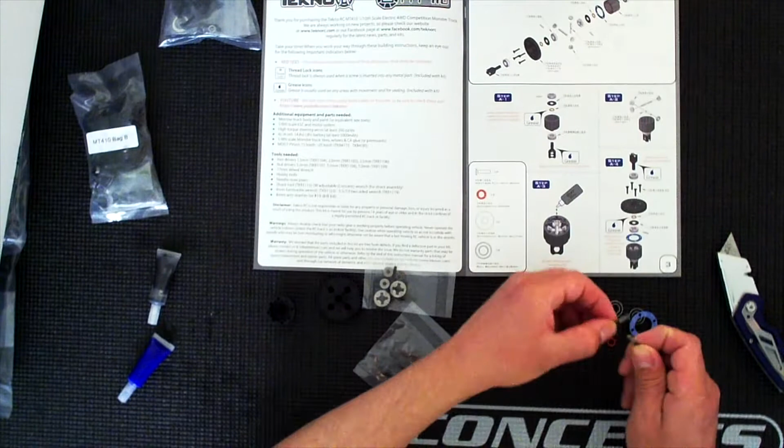One of the things that I like about the MT, this one here for Tekno, is the center differentials. The cross, these are metal, which is great. This is what holds your conical gears for the differential.

On my SCT 410.2, it did not come with metal ones, it came with plastic ones. Now, I never broke any of the plastic ones, so as far as I'm concerned, they're good enough for that vehicle. But keep in mind that if you're running 2S, 3S, it probably doesn't matter. On one of my trucks, I'm running 4S, so I decided to just replace them. I figured I'd do preventative upgrades or preventative maintenance instead of risking one of those crosses breaking.

But here we go. Let's see, spur looks very similar. But we will get started.

Something very important is the O-rings. You always want to lubricate the O-rings as well as these grooves. So there's these grooves in here. Actually, you can probably see them better there. Yep, there you go. You want to lubricate them. That is something that's very important that you need to do.

So that being said, we will just get the black grease that is provided. If you have black grease just lying about, you can just go ahead and use that. Any grease works. But here I'm going to use the one that's provided, so I'm using everything in the kit for the build. Alright, and that is fine.

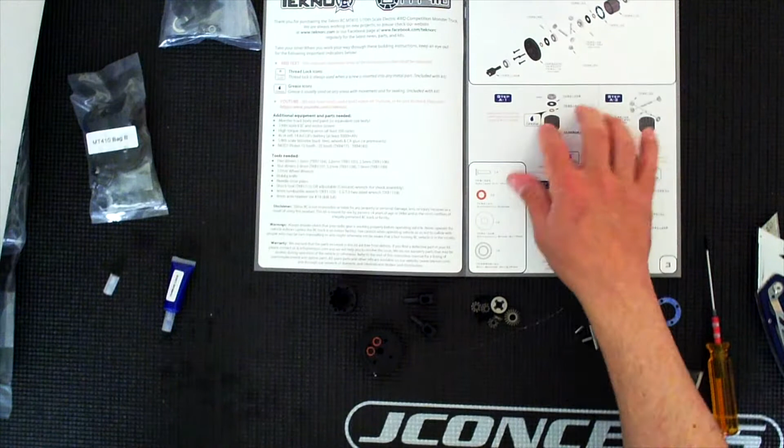So now we can start with the build. Now you can go step by step here. I've built a few of these, so I'm just going to look at the pictures. But you can also just look at this general image and go off that when you're building it.

Shop towels I generally use just for my fingers, but these are pretty good if you buy those. Use terry cloths, except for, I really don't like the lint they leave, so shop towels are pretty good.

But here we go. So that being said, if you look at these, both of these happen to be the same, so it doesn't matter which is which. So at this point, I'm just going to grab a bearing. The bearing will actually go in this housing, so it's just going to snap on. And this piece here will just go in there.

You're going to deal with it later in here. And by later, I mean right now if I can get one of these O-rings out of there. And I'm going to drop one of these O-rings. This diameter is so large that I can actually manage to slide my thumb through.

Now I'm actually going to grab my 7mm driver to just push the O-ring in. So make sure you use a 7mm driver. That just pushes the O-ring. So that's where the O-ring goes, at the bottom. And then after that, you have this washer.

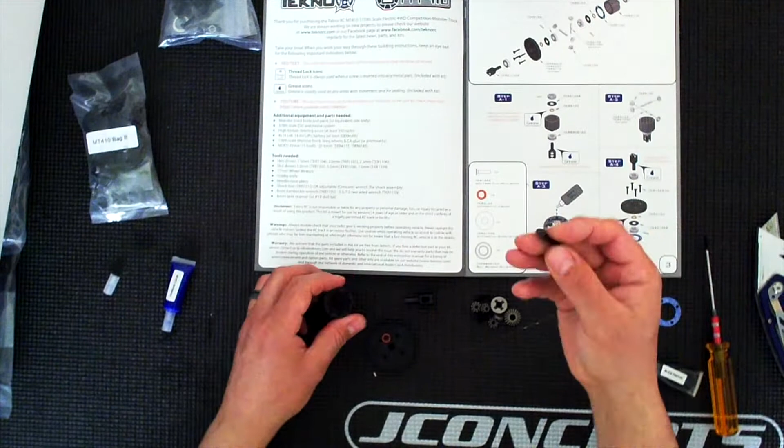Now, I do like to apply a little bit of black grease here, and that's just because this will be contacting the O-ring. You do not have to do this, this is just something I prefer to do. In my mind, it helps preserve the O-ring.

Now, you can try to drop it in if you have pliers. I'm just going to hold it this way and feel for it. Here we go. And then flip it. And it's there. Take my driver. That is seated. Once it is seated in there, you can continue with the next steps.

So the next step is to grab one of these pins. And this pin, you will notice, let me use this one, there is a hole in there. So you're going to have to drop the pin and then slide it in. You can do that a variety of ways. You can try to just line this up.

So if you find the hole, which is here, this is the easiest way. The hole's going to match this groove. So if you know this groove is there, that's where the hole is. You can just line this up with that and then kind of drop it in, and you can fail miserably. Use a driver or just use some pliers, which is really the easiest way to go. It doesn't matter which ones, I'm just going to use these.

These Kobalt tools, I'm not particular to the brand, but they were inexpensive and they're very good for the price. If you already have some others, go for it.

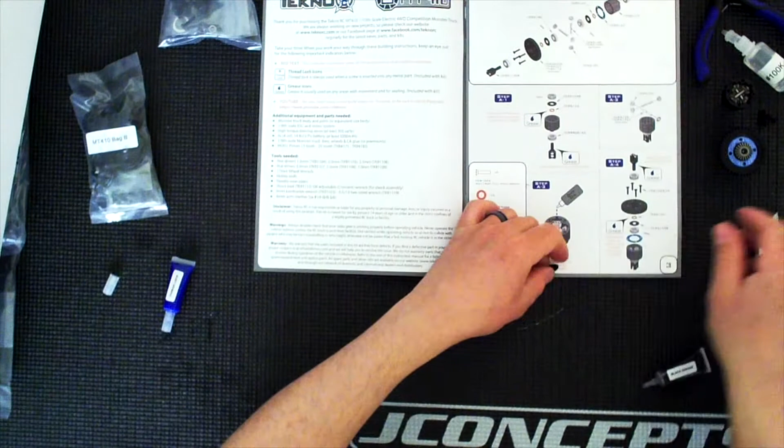Thanks for catching me. Some of you are probably wondering, wait, what about the other washer? How many of you noticed? Let me know in the comments.

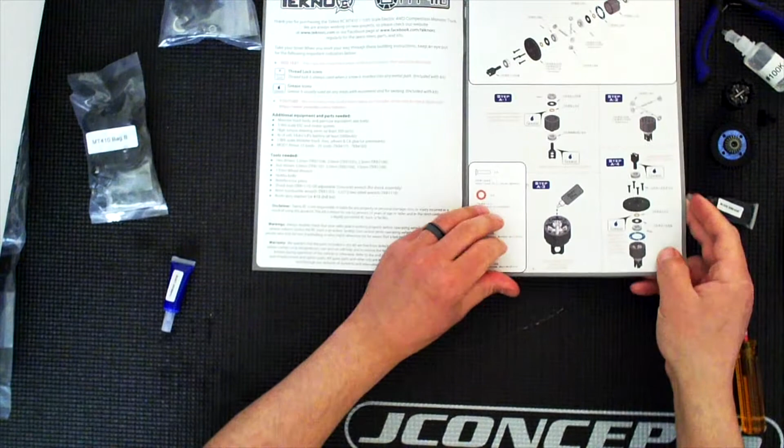All right, so bag B, and everything's labeled in order, right? A's before B, etc. So here we're going to have the front and rear differentials. Therefore, you build one, you're going to build the other. Now, usually you want to mark the front from the rear. In this case, because we're using the same oil, you do not have to, so it will not matter.

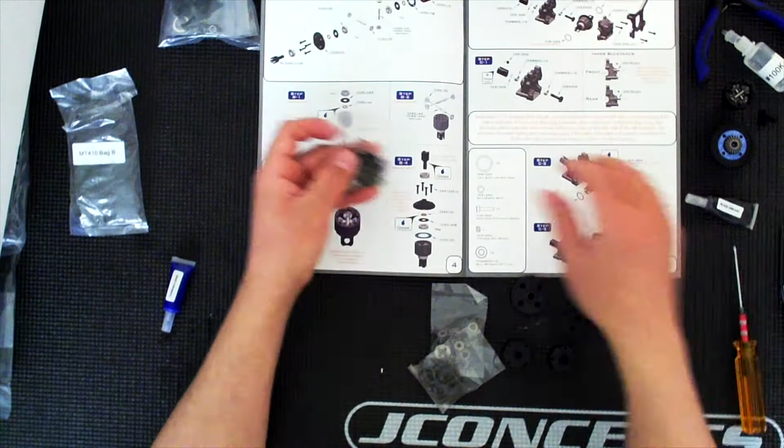Another side note, when you're cutting this bag, be careful not to, one, cut your fingers, but two, don't cut the O-rings that are there accidentally. So that is something that you have to watch for.

All right, we have this. We have these here. These appear to be more robust than the short course version. They are quite heavy for their size. Here we go.

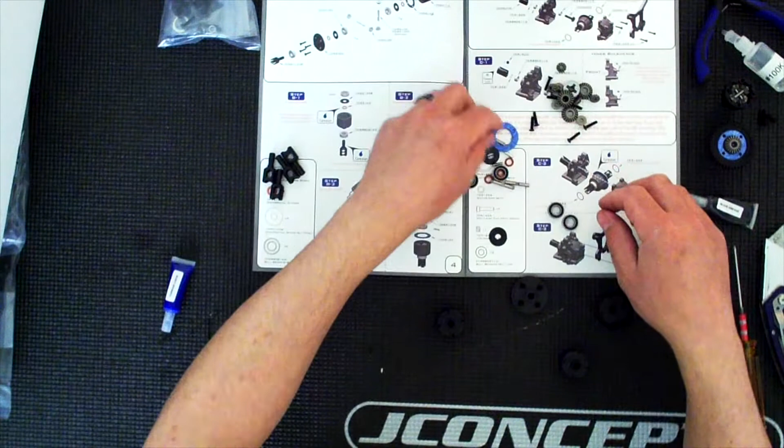And the differentials, we have all the parts here. Usually just spread everything out. There's an O-ring stuck in there. Here we go.

Now this is a basher, so we're building a basher, but just to note, some people, whenever they're doing a race build, they're building an RC for racing, they'll take the bearings and actually remove those rubber seals carefully on both sides, and then they will remove the grease using alcohol, for example. Once they do that, they'll just use machining oil to oil the bearings instead of grease. That's just so they run a little smoother.

And I pre-opened that. Here we go. All right, so here we go. We're going to get started. So we're going to grab one of these and we're going to go through the same process.

The easiest thing is to go ahead and just apply the bearings. If you just place the bearings into every single one of these, here's the gear, here's the other housing, and here's the other one, especially when you're building something like this, just to save time. You have all the bearings, right? We did this step and we did this step right over here.

Now I'm going to go ahead and just grease all of these. If I just apply grease to one, just run this like this with my finger, and I'll have some excess grease, run this grease over here. And here we go. We have enough grease for the other one. There we go.

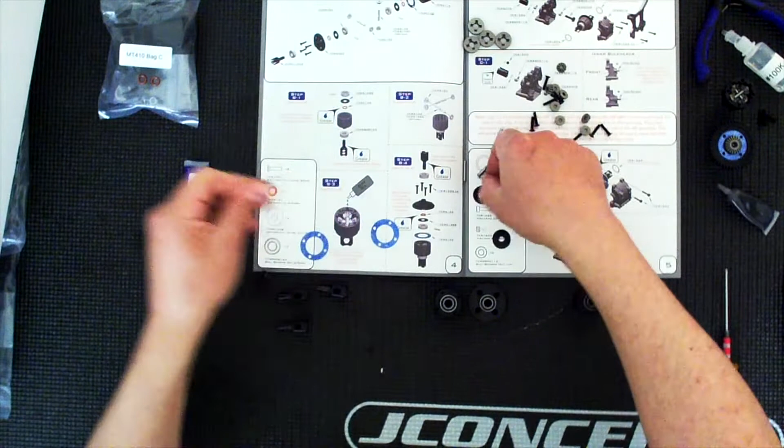And just going to apply some grease to my finger, and the reason why is so I can just play with the O-rings. Here we go. All right, there's one, two, I'll put this on the bag. And there's 3, 4, and then I'll deal with the washers later.

All right, and here we go. So again, grab one of these, go through there, grab an O-ring. See, I should have done it the other way. Just set it on your finger and just hold it. Just feel for it. Once it's there, grab your 7mm driver, push it in, and we're just going to do it to every single one.

If you happen to be watching this video while you're building it, I think this is the best way to build everything quickly - to set similar parts in together instead of doing one and then the other. Just take care of everything that is similar.

Here I'm going to go ahead and place this. There we go. And I can go ahead and grab the washers.

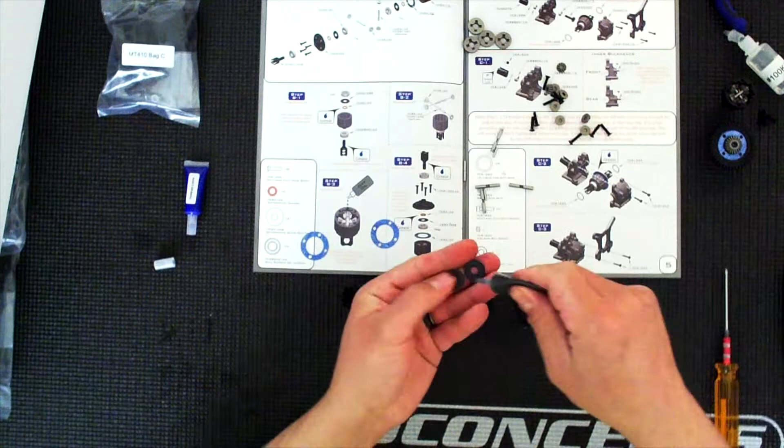There are 4 of these. I'm only going to be applying grease to the surface that will come in contact with the O-ring, and it's not really much that you need. Do not go overboard - it's just a little bit of lubrication so it doesn't tear the rubber. Maybe a little more. That is fine.

There we go. And your pins, they ride on these. That's why you need these, so that it doesn't ride on the O-ring. It just saves it - that's the reason why.

At this point, I'll go ahead and grab this. Again, remember, just align it to that. So this will go in here. Once you have it in there, you can just drop it in. Oh, no.

This one is not cooperating. There we go, all right, so I do that. I can grab one of these, drop that gear in, and that is all.

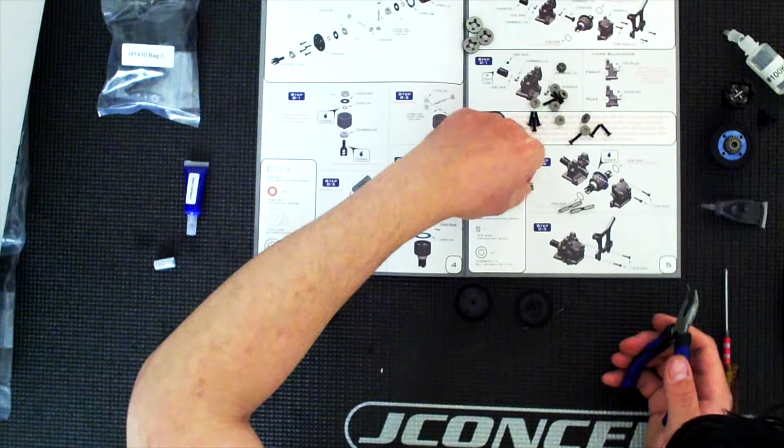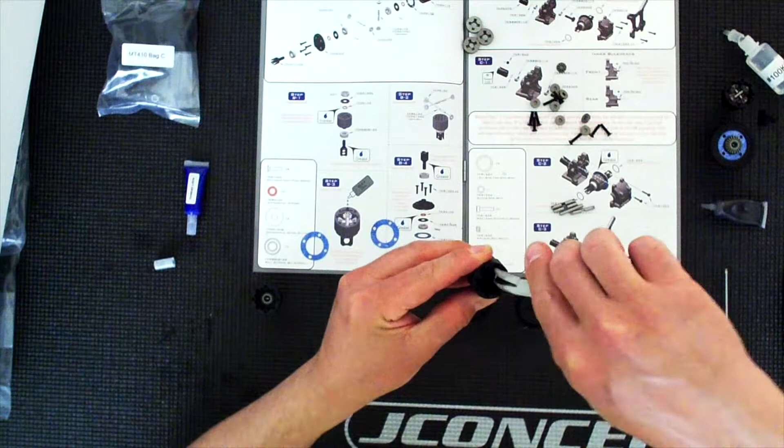Let's see. All right, here we go. Here's the other pin, we'll grab this one, and then our other two are right here. Let's see, here we go. We'll line this up. Perfect.

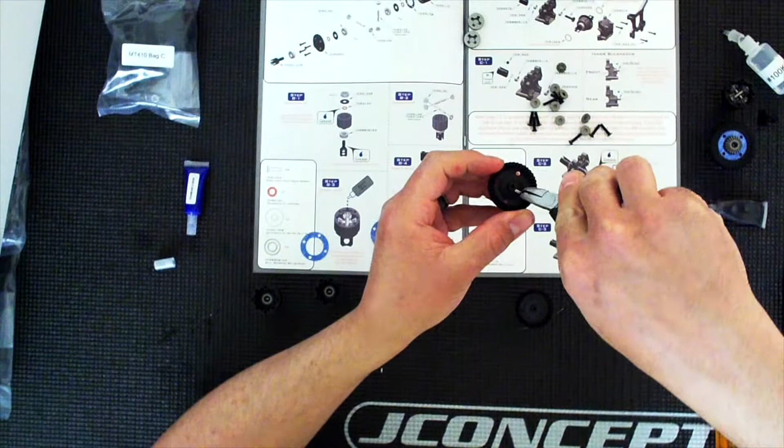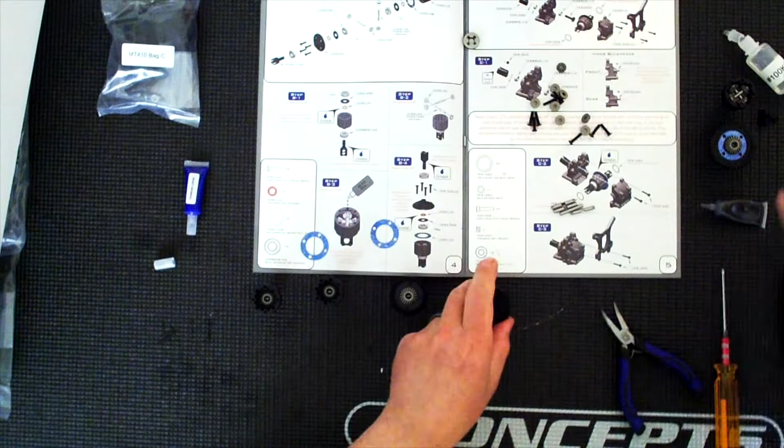We're going to do the same thing to these other sides. While I'm doing that, I just kind of peeked over at that other differential, and this one is ready for more oil. Let me go ahead and just apply more.

Definitely gonna need more. Man, this is really thick.

Now I have dealt with this oil, but not in a long time - it's not an oil that I use often. But if you ever race a Euro truck, for example a MAN truck by Tamiya, that's what most people recommend you use on the front differential, and it works.

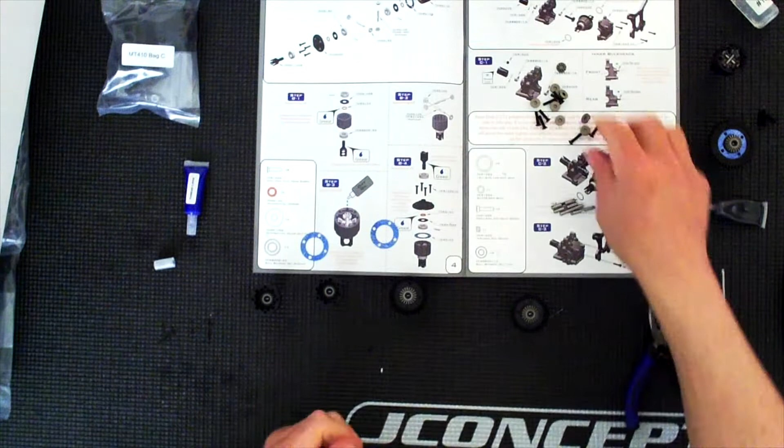Now I can use the conical gears - should have 4 for each. Again, you're gonna have the same type of cross, right? Just like the Lincoln logs. If you can keep them together, you can go ahead and just put all the gears.

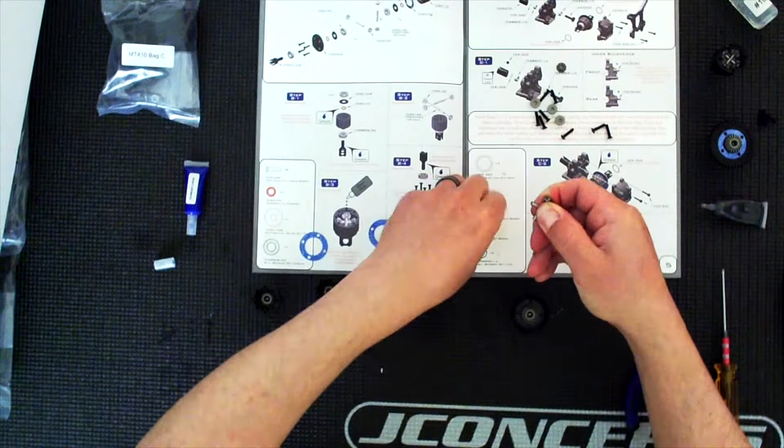I do not know why I keep insisting of doing it this way - just do half and then do the other half and drop it in. Being stubborn, I guess, wouldn't be the first time. There we go - once you drop it in, you can just kind of move them with your finger and they will drop in and mesh in.

So there is one, here goes the other. Again, what I mean by just do one and drop it in - do this, and then make sure that is facing up, so the cutout - you can see the cutout there - and that's because this one's going to sit in there.

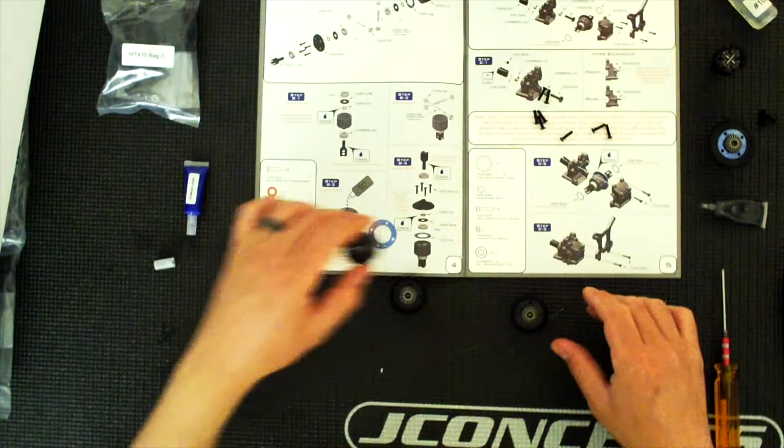All right, here we go. Oops, don't drop them. Center differential looks, yeah, it looks about 1 millimeter actually, a little more. Go ahead and just add a little more oil.

Yeah, center differential will definitely be the most annoying, just because of the type of oil - well, I should say the weight.

Come on, just a little more. So just this way, not too much. There, that should be enough. All right.

It's not a big deal, I just don't like the way silicone oil feels - that's really why I find it annoying. I don't like the feeling. All right, that should be enough. Here we go.

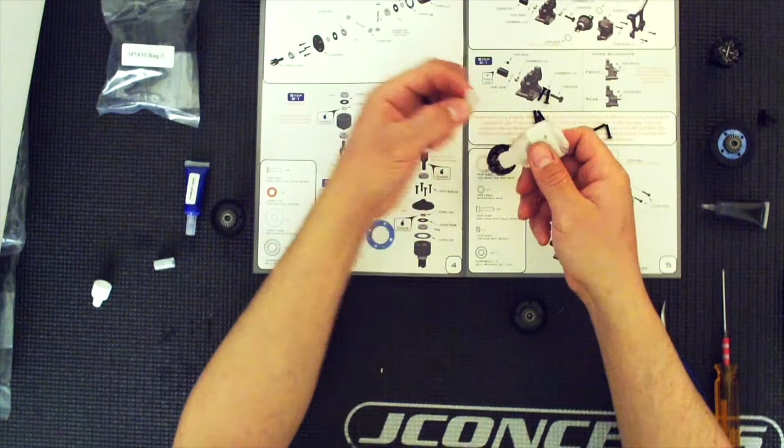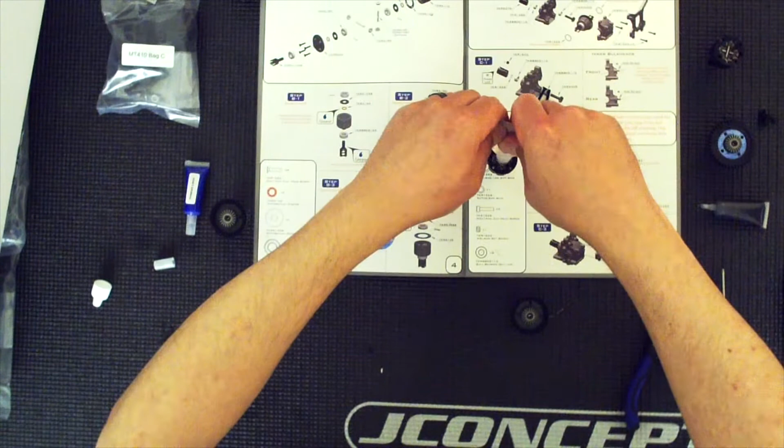Let's get that cap out. The easiest way. Almost seems this would have been easier had this been a tube instead of a little bottle. All right, let's try that for now.

Last time we dropped one of the differentials, it was the 50. So really let me just clean that, put a little more oil, and the center one is ready. So if I put oil here, I will completely assemble that one.

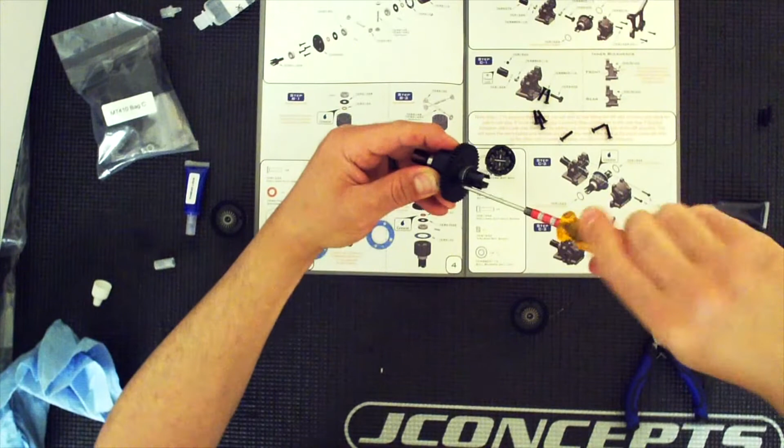All right, it's good. A little bit of oil there, not a big deal. And you're going into plastic, so don't worry about the oil in the plastic. Your screws are not going to back out. So I'm going to start this one. I'm not going to tighten it fully. I'm going to grab the other one.

And really quick, the differential build is pretty much the same for almost all Teknos. I'm going to say almost all of them. It is for the EB410, EB48, same process, just the parts are different sizes. That's pretty much it, but the design is very similar. So once you build one, you're going to be very familiar with how to build the rest of them.

One of the nice things too about building your own kit versus buying something that's already built is I have purchased kits in the past that are pre-built and then screws start falling out. So the pre-built kits, you almost have to go through and just disassemble them and then reassemble them to a point.

But these, step by step, you're making sure every screw fits, the differential is oiled properly, everything. So here is the center, and there's no way to mistake the center with the front or rear. There's just a really big difference in size.

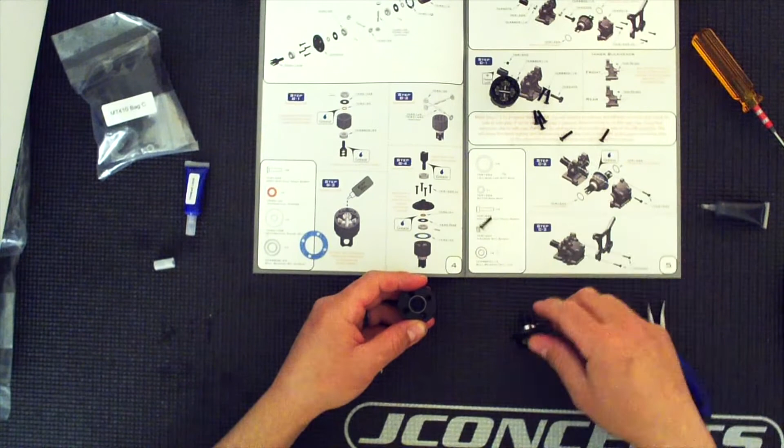And then it's just the 4 screws.

And again, make sure that you keep track of which one the front one is, which one the rear one is. Dun, dun, dun. All right, let's put the other screw.

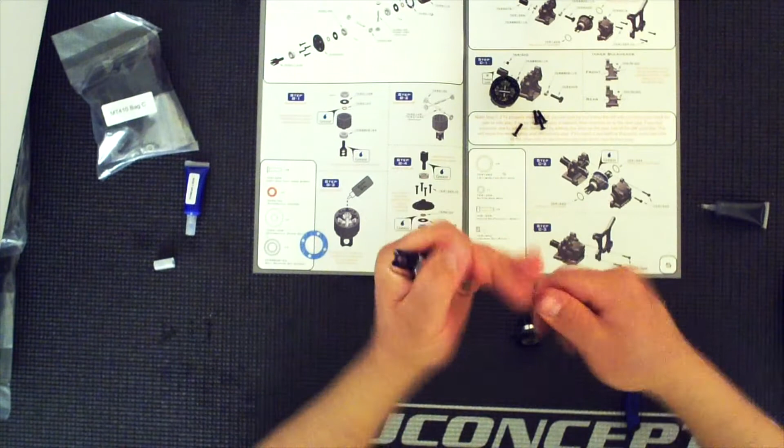I should have taken my ring off. Don't tell my wife I'm taking my ring off. Maybe someday she'll leave a comment and then I'll really know she's paying attention. I'm kidding. Don't tell her.

All right, let's finish with this one. And do not over tighten. That's something very, very important. These should just be snug. If you over tighten, you are going to seize the gears. So this should feel smooth and free. Sometimes if you over tighten, the gears will start to bind inside.

So I'm going to place this on the left. It's off camera, you can't see it. And then I'm going to place the front one on the right. Now, why am I choosing rear front? Well, think of a coordinate plane or line, right? That's the only reason why. It's just easier for me to remember that way.

All right, and we need the gasket. You could set it here, but I find it easier to place it here, mainly because of the groove. Let's see.

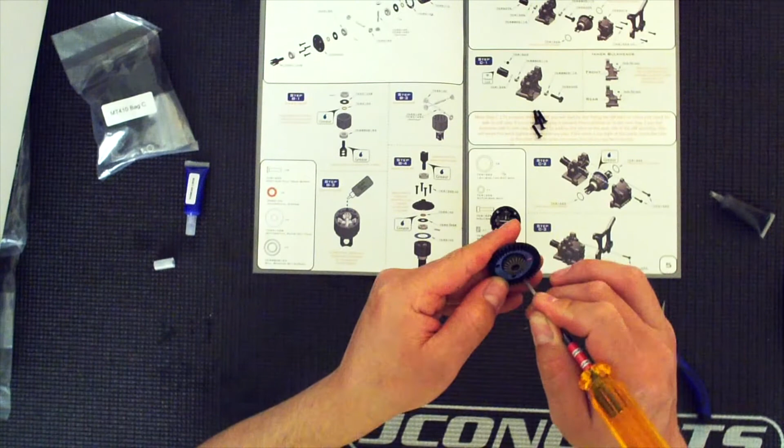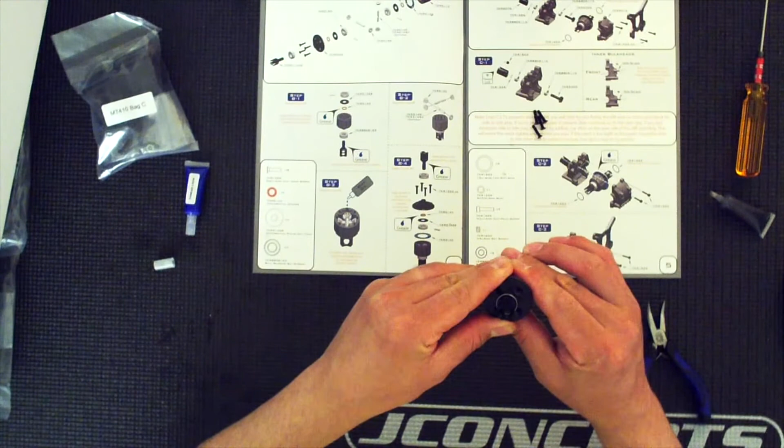All right, there we go.

And something too, whenever you're building a kit, take your time, do it right, for a variety of reasons. One, it's your kit. And two, you want it to last long. Now, if we go back to one and you say, well, what if it's not my kit? What if I'm building it for somebody else? Well, just build it correctly as if it were yours. That's the reason why.

Now, if you say, well, I don't really care about my stuff, then you shouldn't be buying a kit like this then. Buy something disposable. Because it takes a lot of time, so you have to value your time. Not to mention, these things are not inexpensive, so value your work.

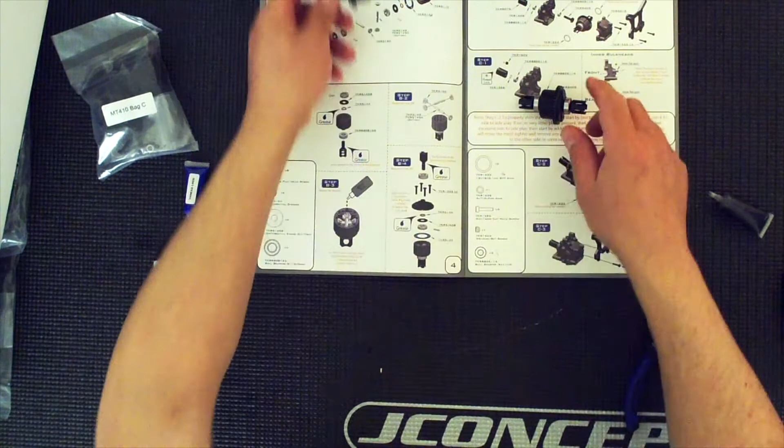Good. So here is the front differential. Now, really quick, if you were to accidentally mix them up, just spin them. The oil, the difference is large enough to where you can spin them and you will feel the greater resistance on the front one. This is the front one. Let's just go ahead and spin the differential.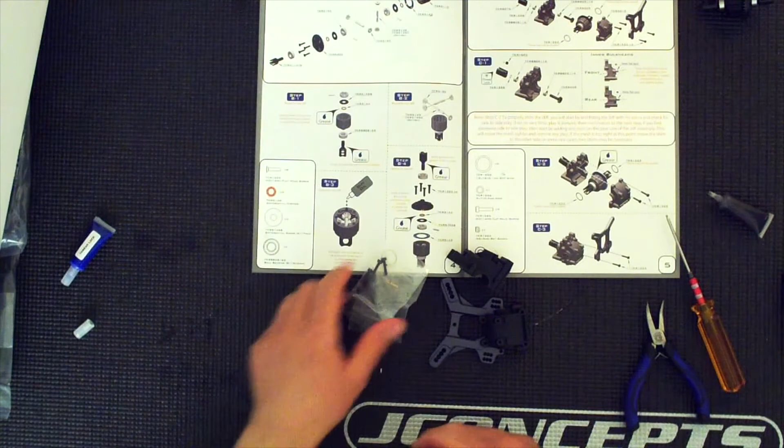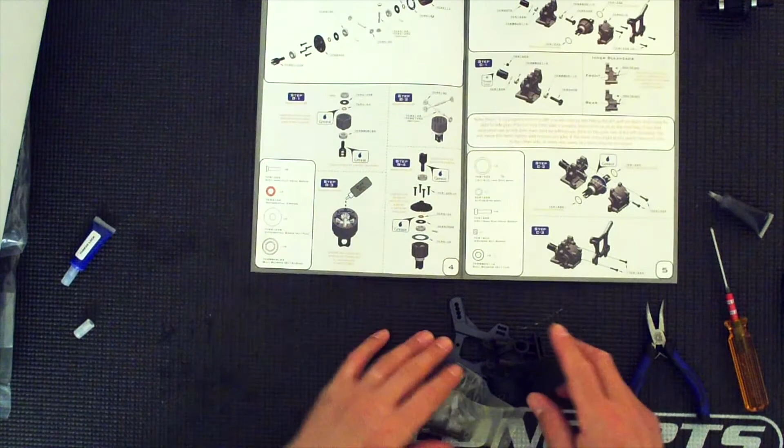All right, so here we go. We're going to go ahead and open bag C now. So we are here. We will actually assemble a gearbox now. So it'll be the front gearbox. Well, actually, should I do it on the next one? This video is pretty long. Yeah, maybe I can do the gearboxes together. I'm going to go ahead and do the gearboxes on the next video. For now, I'm just going to lay them on here.

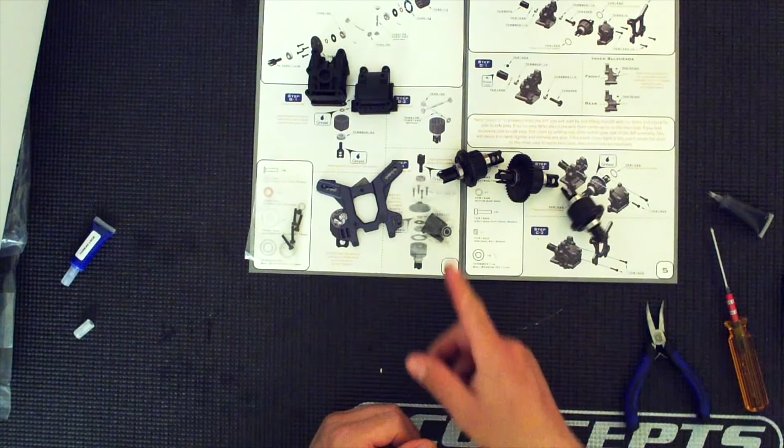Other than that, thank you so much for watching, and here are the 3 differentials with rear, middle, and front. I'll catch you on the next video.